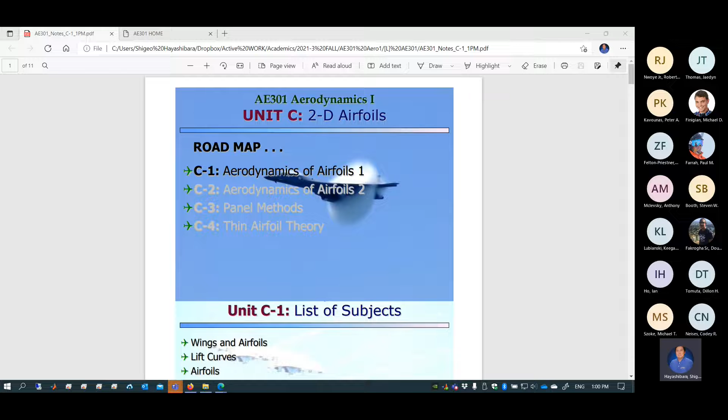Okay, hello everybody, can you hear me? Yeah, we can hear you. How are you doing, are you already at home enjoying the sunshine? Not just yet. Okay, I still have 3 people waiting, but wow, pretty high attendance, that's pretty good. Okay, let's begin today.

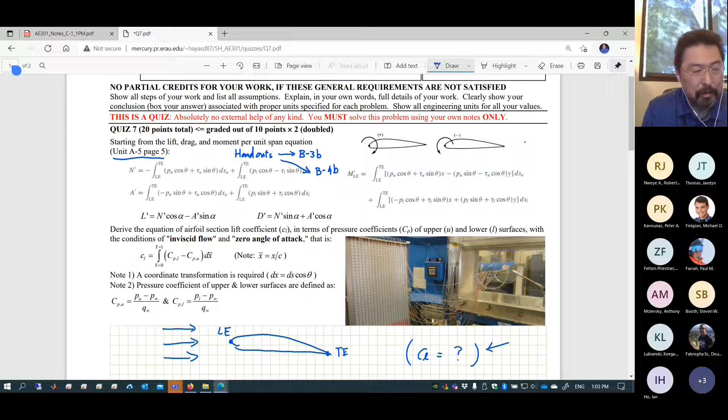This is a super important equation, you're going to use it. After you run wind tunnel testing like this, you're going to determine CL based on at least the pressure distribution over the surface. This is going to happen next semester also when you start taking the wind tunnel testing class.

So please do this. This is the last quiz of the semester. Do all the mathematical derivation to get the lift coefficient out of those distributed pressure and shear stress over the surface. You're integrating mathematically from leading edge to trailing edge to determine lift coefficient per unit span. Any question about this quiz?

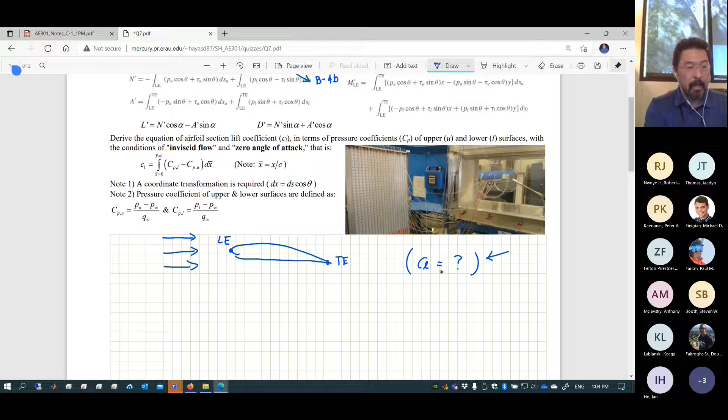This is due right after Thanksgiving, Wednesday, not Friday, sorry. Friday, December 3rd, project 2B is due. And then at the same time as you submit project 2B, you're going to form up your team for project 3A and 3B and start working on it.

Actually you don't have to wait for Friday, December 3rd to start working on project 3, if you're really motivated and interested in using XFLR5. This is all about the panel method. I can't write anything, oh okay sorry, this is a web page, sorry about that.

So this is all about XFLR5 panel method. You can start working on it by taking a look at the lecture notes of Unit C3, this is the YouTube lecture of the panel method. And then project 3A is very simple: you are going to self-learn by yourself what it is and how to use it, and try to understand what the panel method is to begin with.

Based off of that, you're going to work on project 3B, which is a very introductory practice of using XFLR5, which is due on the study day — Friday, December 10th. I'm going to wait until midnight on Friday, okay?

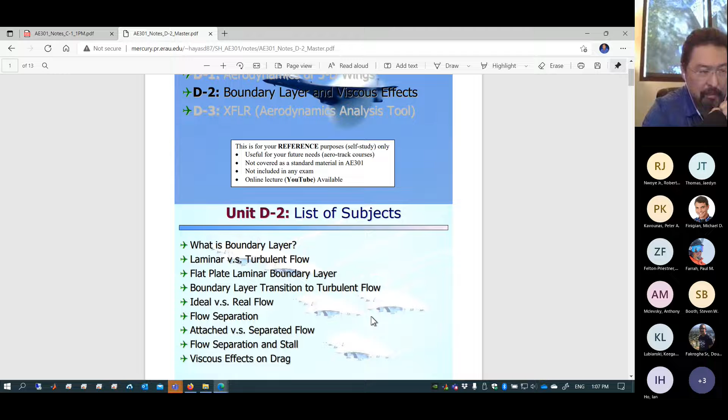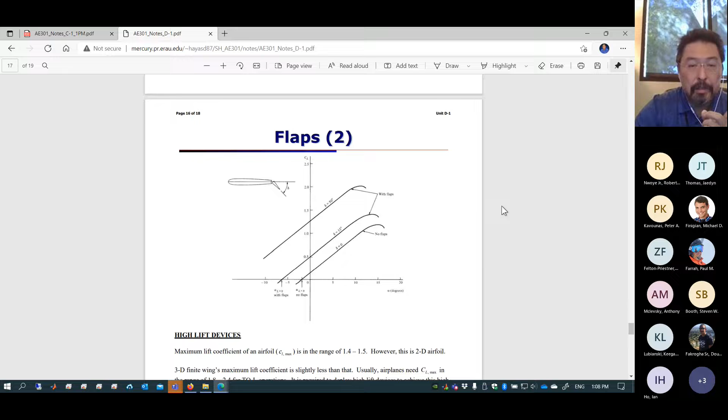Got it, thank you. One more thing we're going to cover later: in unit D1 we talk about high-speed flow, more than 0.3 Mach number. Obviously compressibility starts to kick in. It's not here, sorry, it's unit C2. Yeah, that's right, sorry about that. So in unit C2, compressibility kicks in.

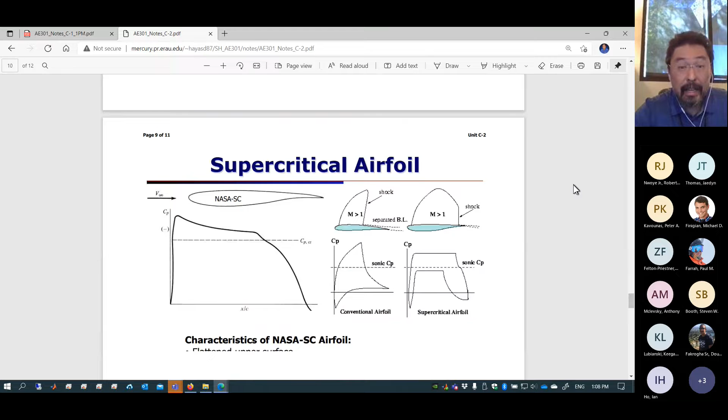We're going to talk about that a bit later, but here, the Prandtl-Glauert correction, for more than 0.3 Mach number, accounts for changing density. This is the equation to correct the CP value. So if you check the box in XFLR5 for using more than 0.3 Mach number, it automatically turns on this Prandtl-Glauert correction equation. This is something added on.

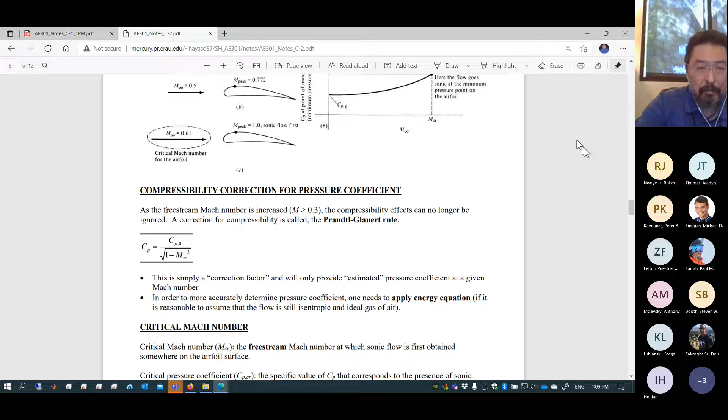So XFLR5 is the panel method, plus compressibility correction based on Prandtl-Glauert, plus a boundary layer model. That's the way you need to understand it. Hopefully you can get that by going through the D3 notes. So this is XFLR5, just an introduction to it.

You're also given a guideline document, a more detailed document. How many pages is it? Quite a few pages, 58 pages. This actually talks about some in-depth theory too. Try to understand that. That is project 3A.

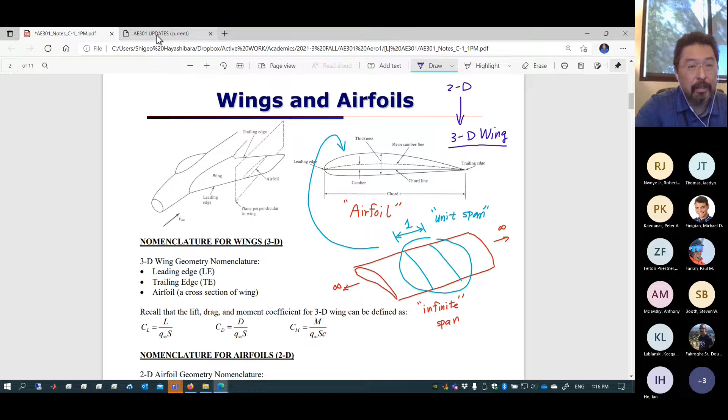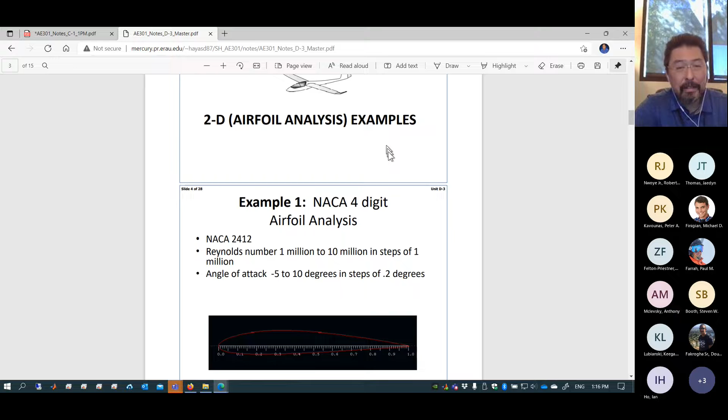So if you take a look at the materials of this unit D3, if you go through the step-by-step process example of how to use XFLR5, you always begin with the cross-section, which is the airfoil. You choose the type of airfoil, then analyze it and build the database — the complete behavior of how this airfoil cross-section behaves. Then, and only then, you use this to create a wing — a rectangular wing.

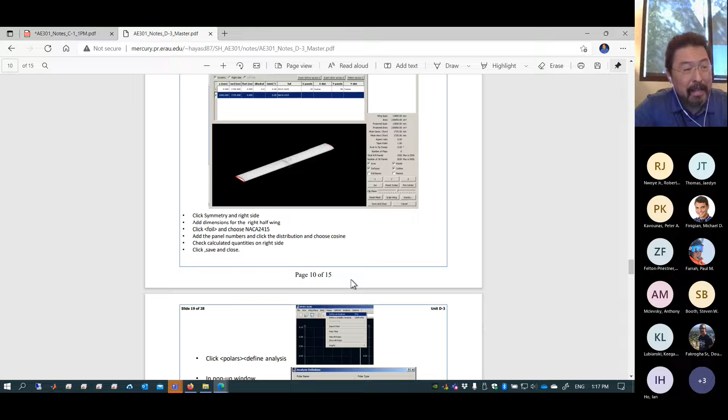If you do not have a database built for this particular cross-section, you can never design anything. So you always have to run 2D simulations to understand the behavior of a cross-section, which is an airfoil, and only then utilize that database to design your wing and predict the wing performance. You have to properly understand the step-by-step process of how to use this software. You cannot all of a sudden create the 3D wing, because the 3D wing is created by the 2D airfoil.

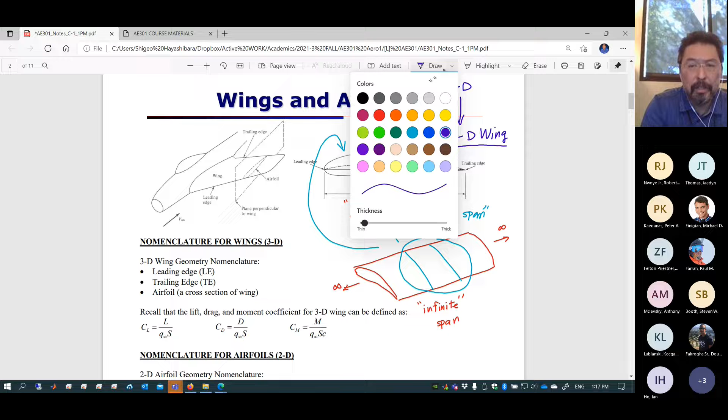So the rest, you already know some of the detailed nomenclature here. This is the leading edge, obviously, it's given. This is the trailing edge. So it's like LE, and this is TE. If this is a completely symmetric cross-section, you can connect leading edge to trailing edge with a straight edge. It's called the chord line.

Chord. And if this is not a symmetric cross-section, we oftentimes call that camber. Camber can be visualized by first defining the mean camber line. The mean camber line is the intermediate point between the upper and lower surface. And then, as you can see, there's a difference between the mean camber line and the chord, which is the difference between chord and mean camber. This is called the camber.

So camber is not a constant value. Camber is 0 at the leading edge. Camber is 0 at the trailing edge. Camber could be maximized at certain locations, so you're oftentimes interested in where the maximum location of the camber is. In order to describe the camber, you need two things: one is the location where the maximum camber happens, and the other is what the value of that maximum camber is. That's called the description of the entire camber of this airfoil.

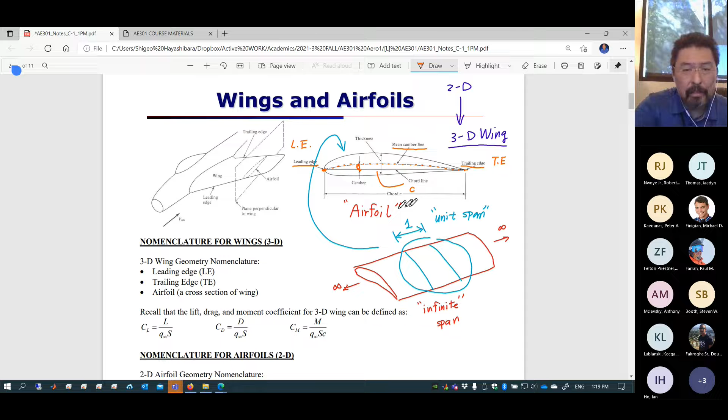So this is obviously a cambered airfoil. Now, obviously, we can have a positive camber, or we can have a negative camber. Negative camber can be understood as an upside-down positive cambered airfoil.

This is like, have you ever seen this? Like Zach, I guess you know this kind of thing. Where did you use it? On wings on cars and stuff, for downforce. That's right, race cars. Race cars' rear wing. Wouldn't it also be for helicopters? Helicopters. I'm thinking of like the Huey, which has an inverted airfoil on its tail section. Tail section, right? Yeah, okay, tail section may possibly be. In other words, you have to keep changing the pitch of the tail rotor. The tail rotor may not necessarily be inverted. I have to research that. The tail rotor, of course, has to create a counter-rotating torque against the main rotor shaft.

But again, this is a race car's rear wing. Of course, the purpose is creating downforce, not lift. So there's an obvious reason why it needs to be inverted.

Is it possible for your chord line to be outside the shape of your airfoil? Yeah, it could be, suppose if you create a huge camber like a turbine blade. So this is like, hey, this is a chord line which is outside of the body itself. It can be, but this is usually not the cross-section of a wing, unless you stretch out high-lift devices such as a flap. A flap actually does this, creating a huge camber temporarily to augment the lift, but at the same time with the sacrifice of increase of drag. We're going to talk about that later.

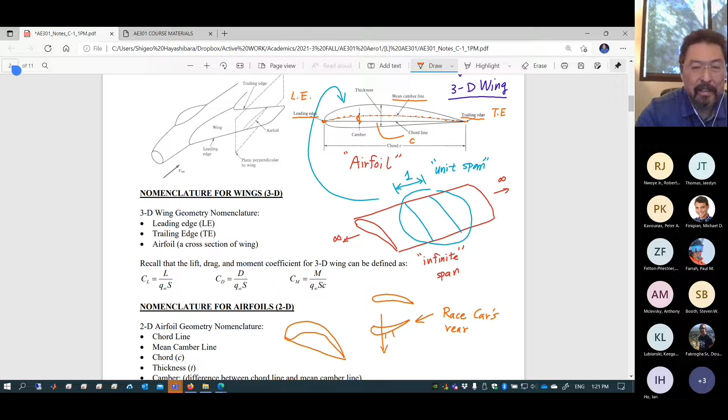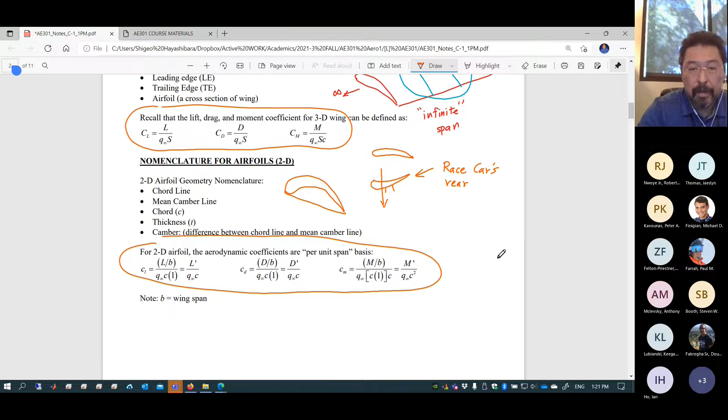So let's move on here. This is, once again, the definition of lift, drag, and moment coefficient for 3D wing versus 2D airfoil. We talked about that already. Let's move on to the next page.

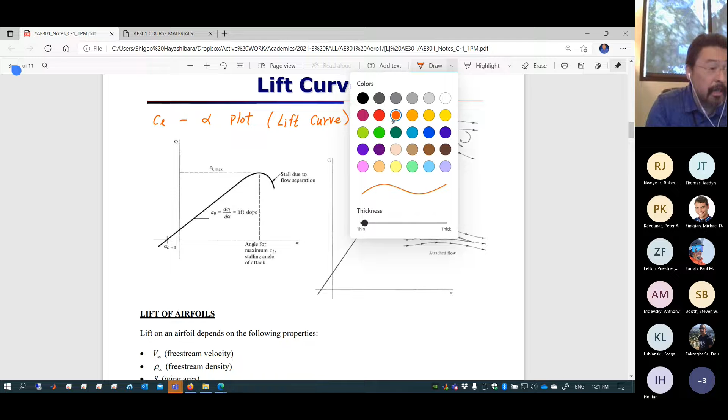So we can first plot CL and alpha. This is the CL-alpha plot, oftentimes called the lift curve. We already know this, and I think we even used it in the past. Oftentimes this is considered fairly linear, not exactly, but fairly linear. If this is linear, you can define the slope. This is called the lift curve slope. We used it—when did we use this to determine what?

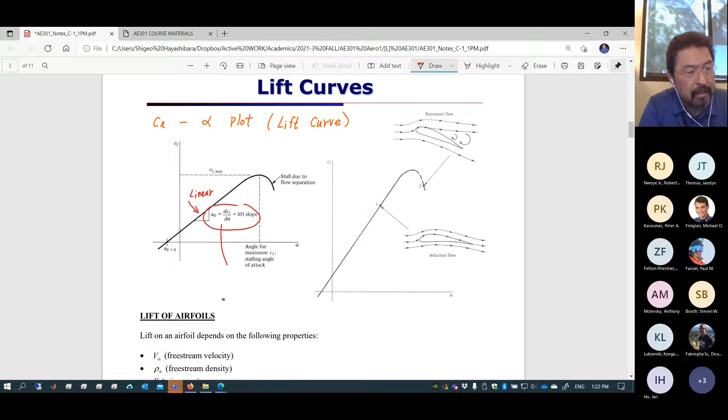Somebody please remember this. Do you guys remember midterm exam 2, problem 1? Determine X. XCP or X? No, this is A0—no, it was, isn't it? XAC, this is for A0, center, isn't it? Did you use this A0 for something? Aerodynamic center, yeah. XAC, aerodynamic center, that's right. So aerodynamic center, that's right. Yeah, aerodynamic center. That was it. That's right.

This is aerodynamic center. So A0 and then M0 — M0 is of course the moment curve slope at the quarter chord. If it's completely symmetric, this is 0, meaning the aerodynamic center is at the quarter chord. Anyways, remember those things. But this value is usually 2 pi per radian, or if you convert it to per degree, 0.11 per degree. That's the value — it's fairly constant, you cannot really alter this dramatically.

As you increase your angle of attack, as you can see in this plot, you also increase the lift coefficient. So as you pitch up more, you create more lift, but there's a certain limit right here. This is called stall.

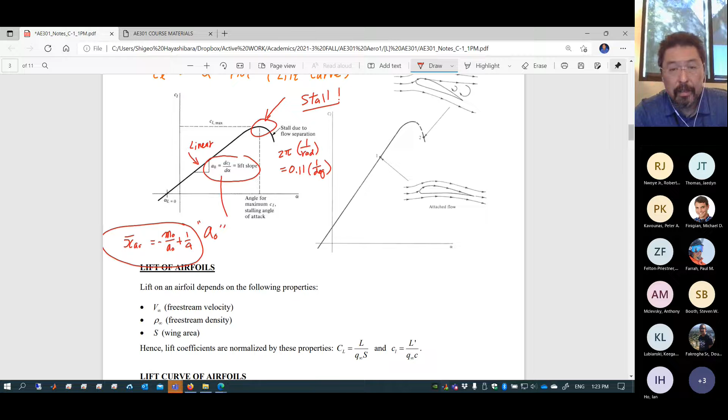Now stall is usually caused by flow separation. The flow separates, and that's what actually causes the stall. Flow separation is created by a highly adverse pressure gradient, so the flow cannot follow the contour. The flow separates from the surface, and as it separates it creates pressure relief — that's what we looked at.

Flow separation behavior may be completely different based on the type of airfoil, so we can compare a very thin airfoil versus a fairly thick airfoil to see the difference. The behavior of this stall region is very important when designing an airplane. If you don't carefully choose the post-stall characteristics, your airplane might be very difficult to handle. At the same time, you don't want a very thick airfoil for high-speed airplanes, and vice versa, a very thin airfoil for an airplane that requires huge internal volume. So it's always a trade-off, but the design of the cross-section significantly changes the post-stall characteristics too. We're going to take a look at it.

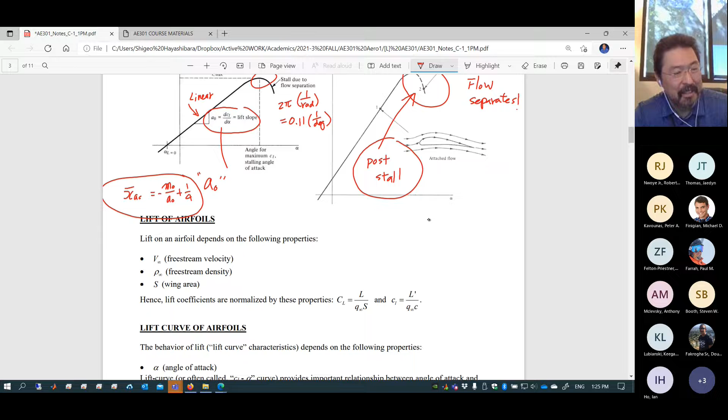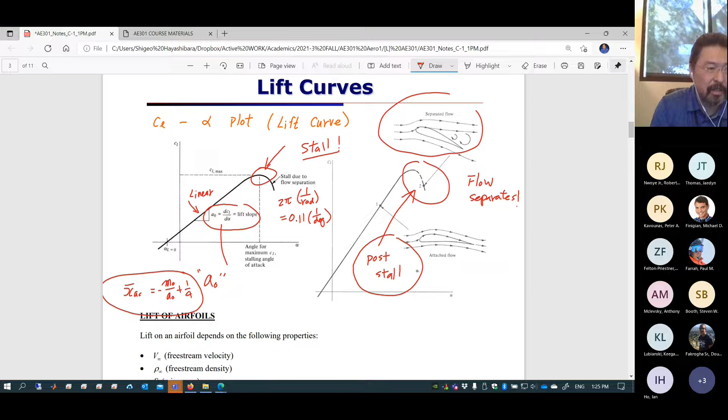XFOIL can actually predict to a certain extent these post-stall conditions, because stall is mainly a boundary layer issue — boundary layer separation determines the characteristics of the post-stall. XFOIL can come with boundary layer predictions, and as you choose to add the boundary layer simulation on top of the panel method, you can predict to a certain extent the post-stall characteristics of the airfoil, which is the beauty of this software.

So now, next page — those are the types of airfoils. This one is fairly well known: Beechcraft Sundowner, Bonanza, a classic Beechcraft passenger airplane. Those are NACA — well, this is NACA 6-series.

Please take a look at the handout for that. This is oftentimes called the natural laminar flow airfoil. I think I have a handout — let's just take a look.

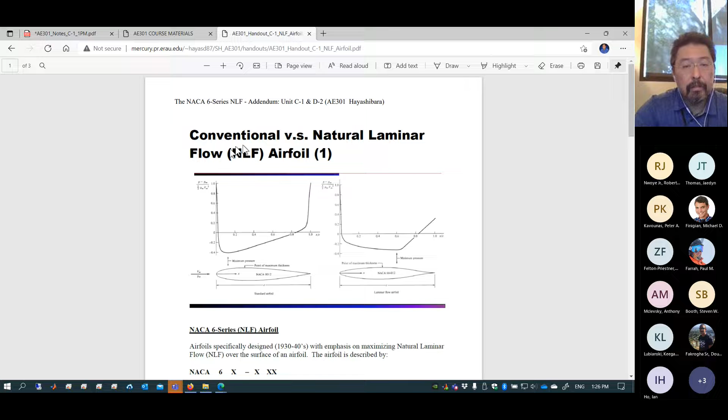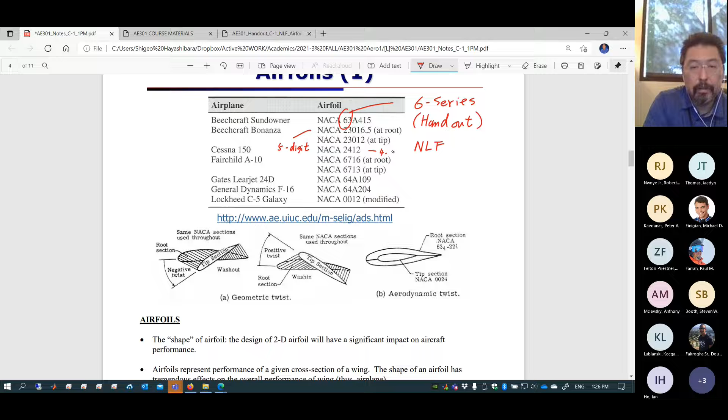So this is the natural laminar flow airfoil, NACA 6-series — please take a look at it. And then this is NACA 1,2,3,4,5, the NACA 5-digit standard. This is NACA 2412, of course a NACA 4-digit. So NACA 5-digit and 4-digit are called NACA conventional.

Now, what makes the design of an airfoil conventional? This is usually when the aerodynamic center equals the quarter chord. If you put the aerodynamic center at the quarter chord — actually no, sorry — the aerodynamic center is at the quarter chord, period, no matter what. But...

...maximum thickness — maximum thickness is around the quarter chord location. That's called NACA conventional design.

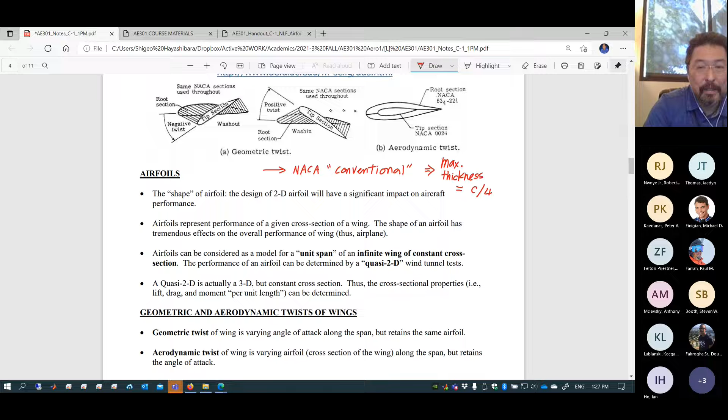And obviously you can choose any cross section to create any design, right? So you can choose, at the root section, the same cross section, but at the tip you change the angle of incidence — you physically twist your wing. This is called wash out. So this is like a root section, and then at the tip I'm going to increase the angle of incidence of this cross section — this is called wash in. So those two are physical twists, something called geometric twisting.

Student: For the NACA conventional, is the max thickness the same as the quarter chord length, or is the max thickness located at the quarter chord length?

Yeah, so this is like a conventional shape — it's cambered, okay, this is the chord. So if you take the quarter chord location, that's where you see the maximum thickness.

This thing is usually called T max. T max is located at quarter chord. Now you can choose to shift this maximum thickness location further aft, making, let's say, half chord length the maximum thickness location.

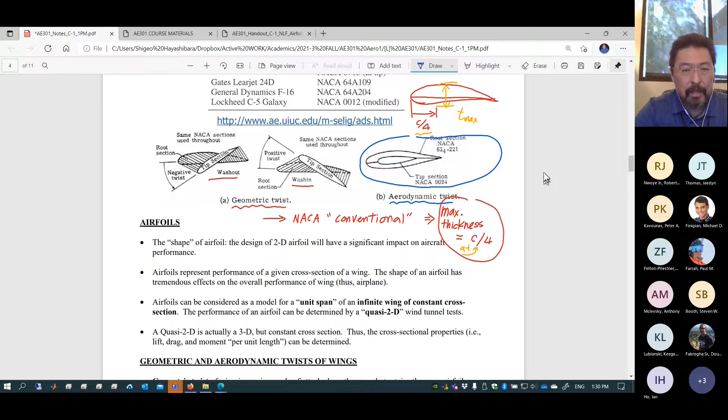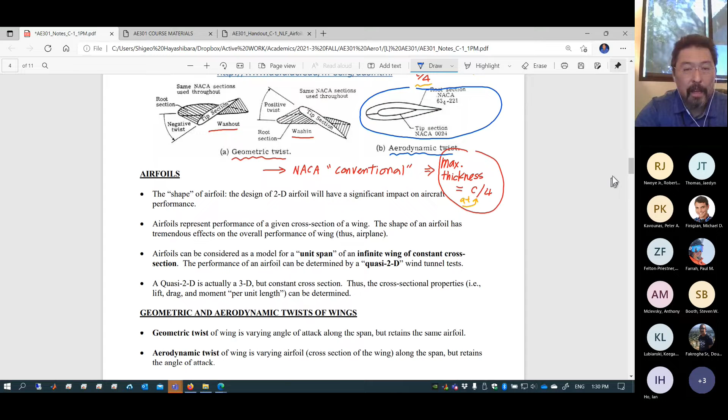So here are some techniques to choose to design your wing, using XFLR5. XFLR5 can allow you both. Now, of course, the choice of airfoil is going to have a major impact.

Now, if you put the camber, what is the immediate result? You are going to actually create lift, even though you are not pitching up at all. Because of the amount of camber, you already create lift at the 0 angle of attack. So in order to have 0 lift for the cambered airfoil—this is, by the way, positively cambered airfoil—the positively cambered airfoil needs to pitch down to have 0 lift.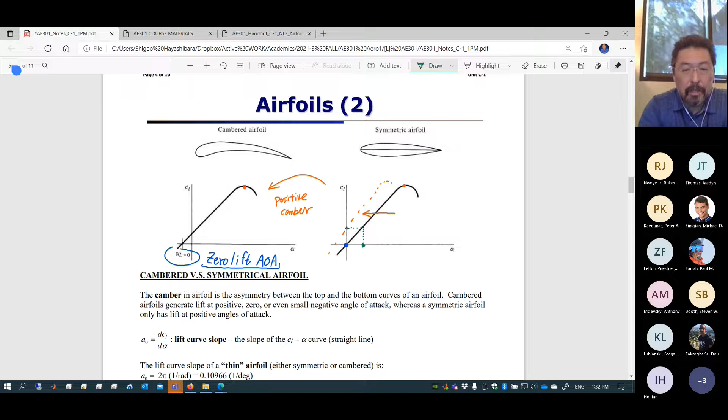What it does is the following: let's say for symmetric airfoil, for this much angle of attack, it corresponds to this much lift coefficient. For the cambered, positively cambered airfoil, with the same amount of angle of attack, you are now creating a higher value of CL. That's what it is. But the whole thing is only shifted, so typically the maximum lift coefficient, CL max, is not really changed. So you have to be careful about that.

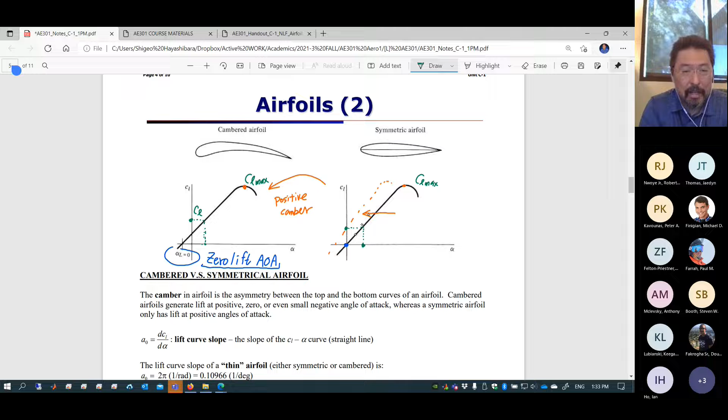This is called positive camber. Now, can you imagine negative camber, which is upside down flight? What happens with negative camber? Let's think about that. Positive camber shifts the whole thing to the left. What happens to the negative camber? It shifts to the right. You're right, you guessed it right. So this happens—this is negative camber.

So this is upside down, positively cambered airfoil. So if it's negatively cambered, now with the same angle of attack, you only produce this much lift coefficient. So that's what it is.

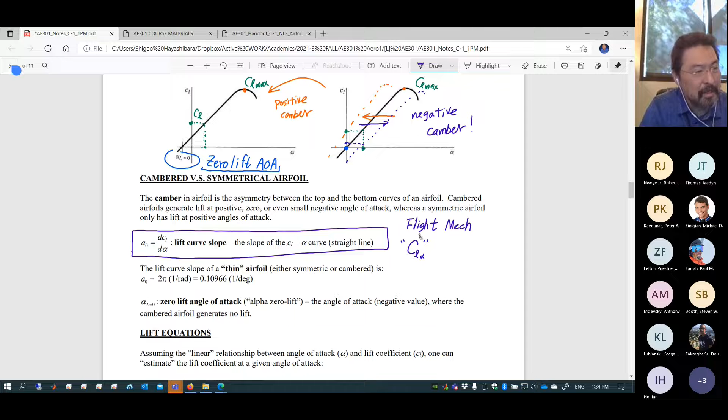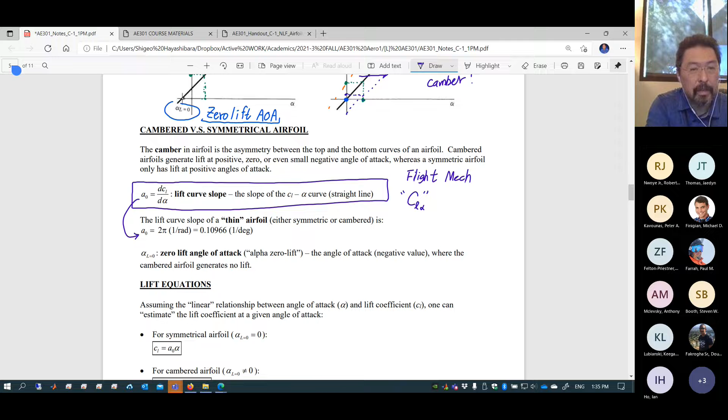So the important thing is lift curve slope A0. This is usually unchanged. By the way, for flight mechanics, this is actually CL alpha—CL partial derivative with respect to alpha, CL sub alpha. That's flight mechanics notation you're going to encounter later. And this is typically 2 pi, especially for thin airfoil—2 pi per radian. And the zero lift angle of attack: if you put the camber, of course, you have to have a zero lift angle of attack start to show up. If you put more positive camber, this is going to be shifted more and more to the left.

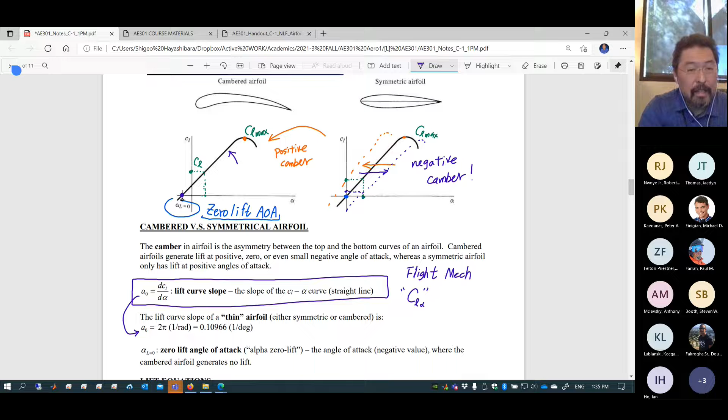So that's what you need to be doing. So in order to predict the lift—this is a linear line—for a given angle of attack alpha, and given alpha zero lift, can I compute the lift coefficient for a given angle of attack? Yes, we can do that. So for a given alpha angle of attack, CL is equal to A0, which is typically 2 pi per radian or 0.11 per degree, times alpha minus alpha zero lift. This is the equation to predict the lift coefficient for cambered airfoils.

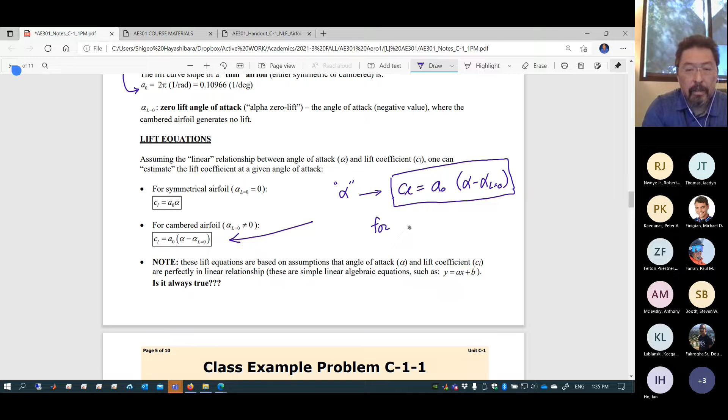Symmetric means alpha zero lift is zero, so that means CL is equal to A0 alpha. This is a symmetric airfoil. So those two are the equations.

Equations, actually linear equations - that's essentially this line and also this line. This is the CL equal to A0 alpha line. This is CL equal to A0 times alpha minus alpha 0, right? So this is essentially a linear equation. You can actually pick it up and use it.

So this is CL is equal to A0 times alpha minus alpha 0 lift. Or if it's symmetric, this is CL is equal to A0 alpha. Okay, now having said that, let's just take a look at the next page.

Can an airplane fly upside down? What do you think, if the wing is symmetrical? Well, if it is cambered, do you think you can still fly upside down? Yeah, but not recommended - no. Well, okay, let's find out.

Can it just pitch up more? Yeah, of course - at inverted flight, pitch up more, then you can possibly fly. Okay, that's what you're thinking.